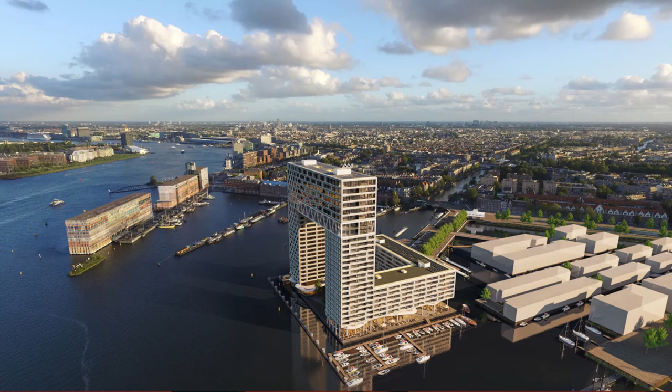Before Jeffrey and I start talking about how this building was engineered, let me give you a quick introduction to the building itself. In 2006, we won the competition for Pontsteiger, a building to mark the new old part of Amsterdam, Houthavens. These former timber docks are being transformed into a housing area.

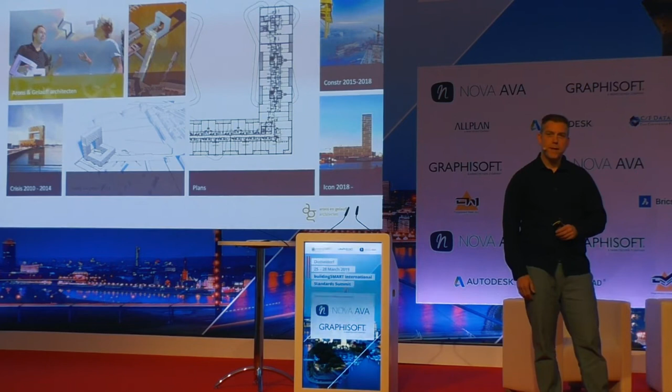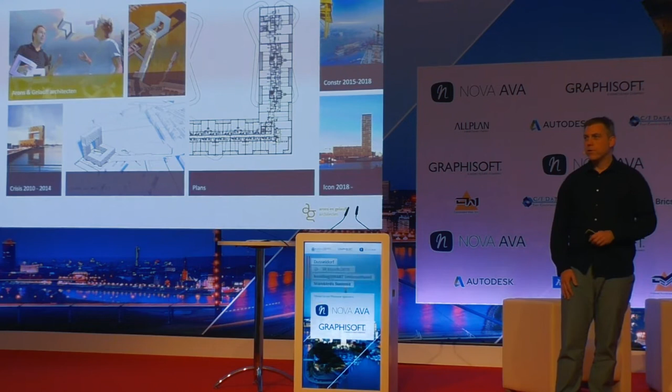Me and my colleagues worked very hard on filing the 2D building permit and finished just in time before the financial crisis hit. It got cancelled. In the years that followed, many attempts to revive the plan had failed, until 2014, where Dura Vermeer and Designclash bought the land, the water, the plan, and luckily they bought us as well. Construction started in 2015, and now we have a proud award-winning landmark, Pontsteiger.

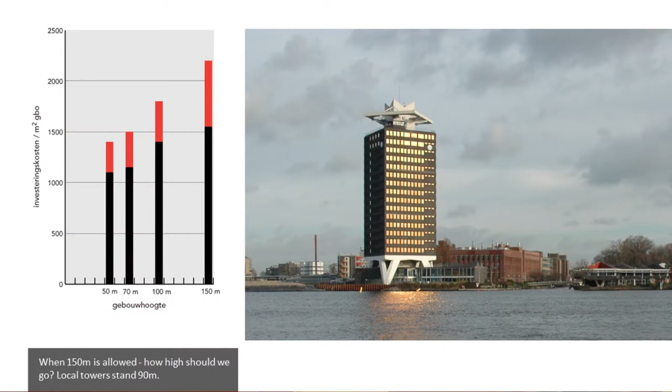But why does this building look like a chair? We were allowed to build a tower 150 meters high. But should we? Because all the local towers in Amsterdam are about 90 meters high. It's a housing project, so we need to take into account where people would like to live. It's no surprise to you that most people would like to live in a penthouse or at ground floor. So an hourglass shape is therefore the optimal solution.

Of course, we tried many other shapes. Now let me recap months of hard design work in a few simple steps. A tower. A high tower would be a landmark, definitely. You would have a great view over Amsterdam, and you can even see the sea. But what about the public space? Tower entrances are always windy, the view is for the happy few, and the surrounding area, Houthavens, will be low-rise.

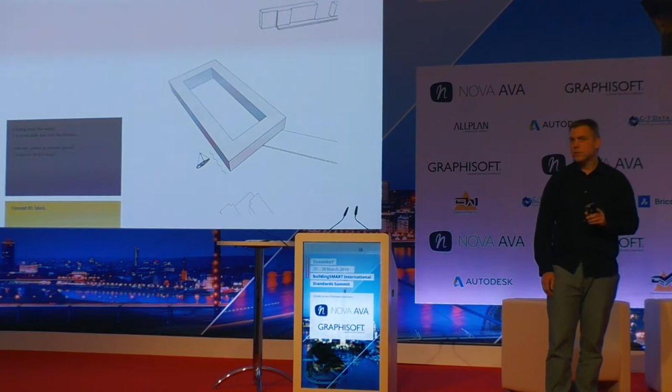A block then. Everybody would be living at the ground floor, near the water. The building would be in scale with the surrounding Houthavens, but there's an interior space. We would say, make it public, but the residents would like to keep it private. Oh yeah, we also got a footprint in the design brief, and a building like this would never fit.

A block tower then. Lots of people would be living with a great view. It's a high-rise, so it can become a landmark, and lots of people would be living on the ground floor near the water. And if we lift the building 2 stories, we also solve the public space.

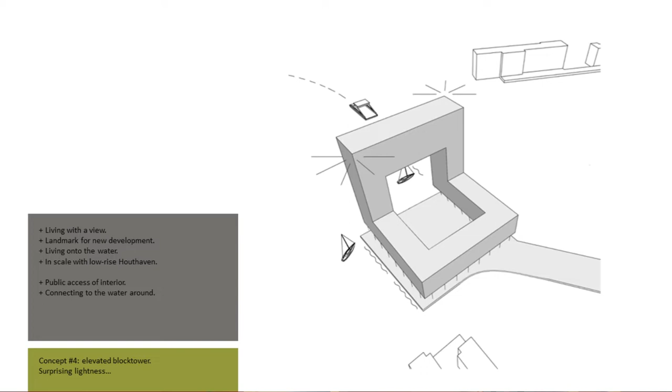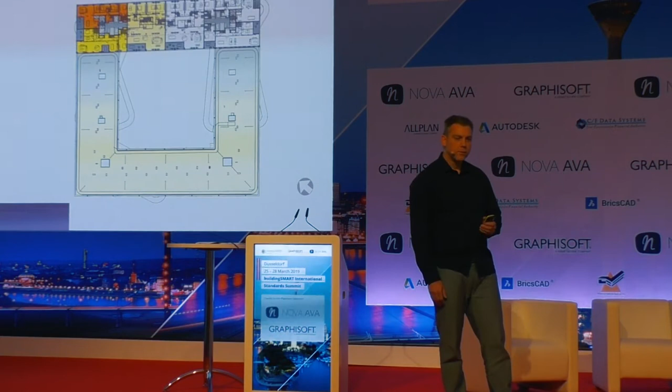Now, Pontsteiger means ferry dock. The old ferry dock was demolished to make room for 2 layers of parking, public spaces, entrances, and the new ferry dock. On top of that, the block tower. Low-rise and towers contain 300 rental apartments. On top of that, the part that we call the bridge, which contains 66 market apartments, expensive apartments with a beautiful view.

Okay, Jeffrey, let's build this landmark. Thank you, Menno. Very nice to see that an architect with such a vision can realize such a beautiful project. But how do you organize such a project?

For us, it all started with agreements, because with agreements you can come to a good collaboration, and with a good collaboration you can make such a landmark. So, how do we start? Get a room. If you get in a room with people, you can discuss the different ambitions that all the parties have, and also stretch each other to do a little bit more than they're used to. So that's what we did.

We defined our ambition, and then we started, not by reinventing everything ourselves. Lex van Zijn, also here with us, together we sat down and said, okay, how are we going to organize it. So we had a simple statement: use and combine available knowledge and standards rather than reinvent it yourself. And that was our motto during the whole project, and even now.

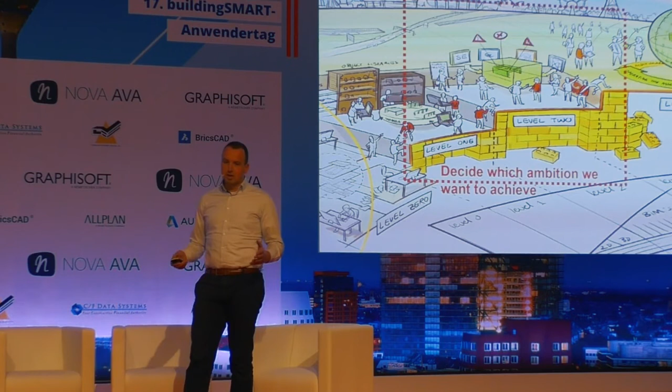In the Netherlands, we have the BIR, with also the BIM loket, and they described a vision about different stages of BIM. You could start by sharing documents, but that's not BIM. You can start at your own company using BIM models, but that's not BIM either. No, we said our ambition is level 2, so we want to share and organize BIM models throughout the whole supply chain. And we decided with the whole team that this would be the ambition.

What is our way of work? We didn't reinvent it ourselves, but borrowed it from Gieling on this point. We used a Hamburger model. I don't know if you know it, but it's a way to look at a project and to organize your project concerning information management.

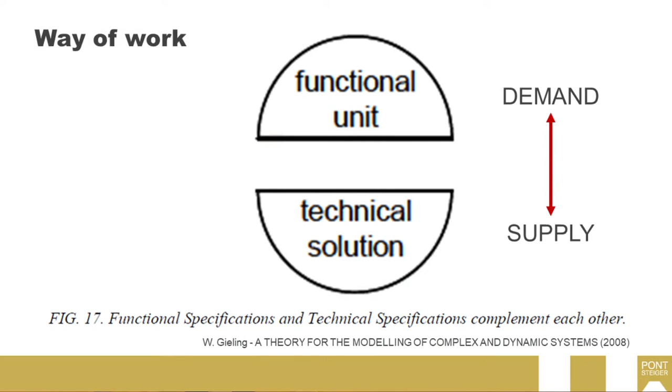It really has a demand and supply side, and it's key to have focus on the project itself, so everybody doesn't just look at their own part, but looks at the total.

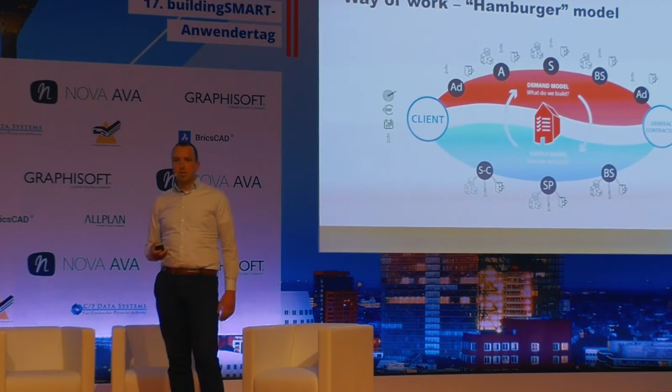You have a demand side with designers, the architect, the structural engineer, the MEP engineer, and afterwards you get together with the suppliers, with the people who install the MEP. You get all the knowledge on the table and get the best product for the client. So, two parties who not only build this project but also develop the project.

The most beautiful thing that happened here is that we got one vision on how to BIM. No company started with standards, but just from scratch and with all open standards in mind, naming the why, the how and the what. So we could convince everybody who wants to join this project, knowing what is expected of them. So a simple plan.

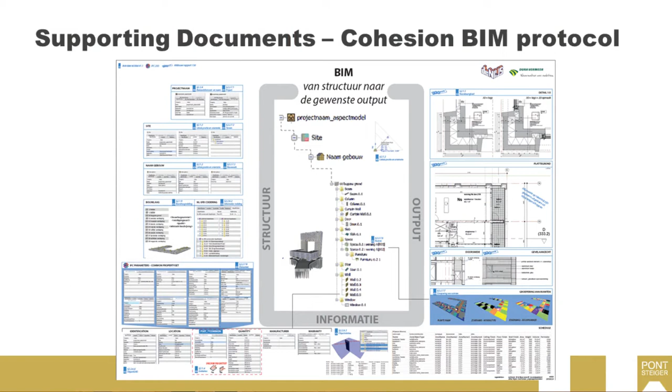But a plan is not only a plan if you don't explain it. So we all made supporting documents to explain to people how to use open standards, because in 2014, 2015 in the Netherlands it was not common to use open standards and to agree on this kind of things.

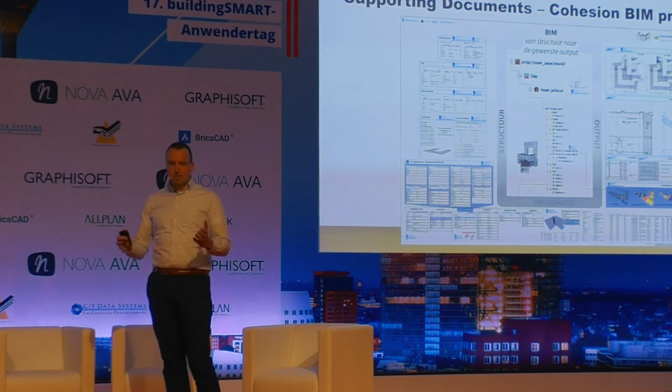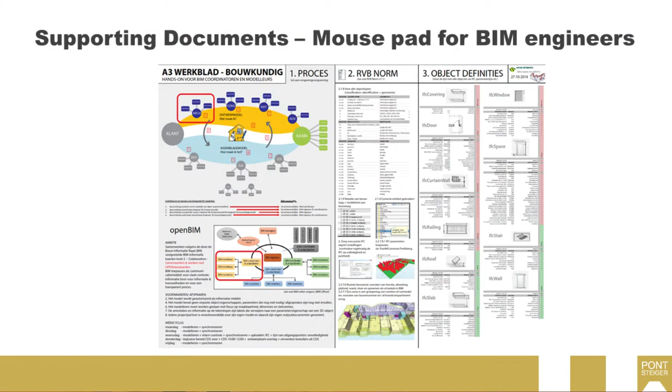We made mousepads for the BIM modelers and BIM engineers to make it easy for them to follow our agreements. Because you can say, here's your contract, do like the contract asks you to do, but you can also motivate them, help them to really accomplish that.

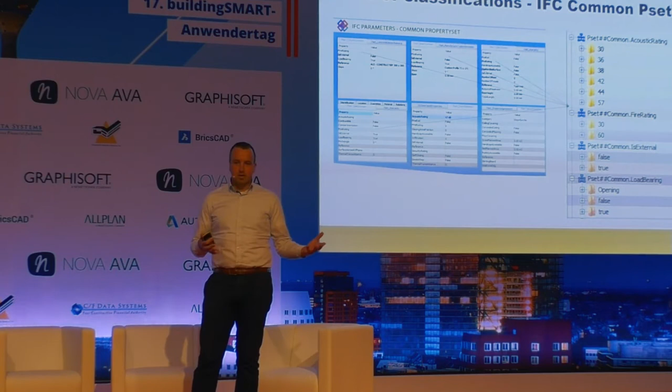So that was really the story about agreements, and then you have to go into the project and help each other. Help each other to export the right IFCs, help them put in the right information and find information by use of classifications, and make sure that if someone doesn't get it, you explain what's handy about it. So we do all kinds of stuff to show other people how this works.

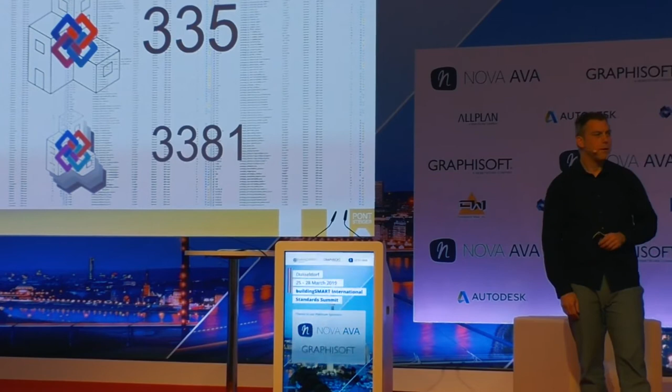So in order to clash, we first need to build our models according to all the agreements that Jeffrey just explained. Clashing two perfect models will still result in too many issues if there is no communication. We need to get together.

This was already a challenge in the design phase, where there were only three companies working together. We all used the same software, Revit, so we could link each other's models into our own to create a fast workflow.

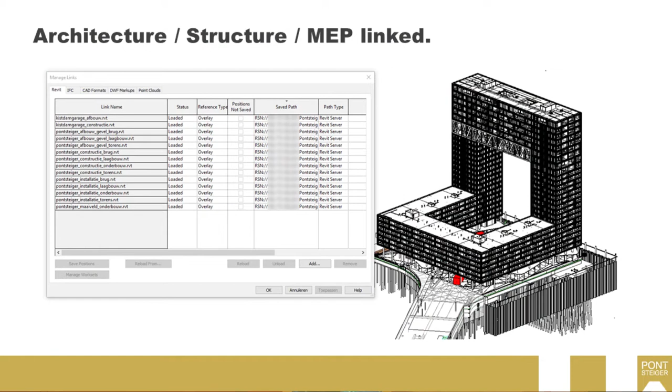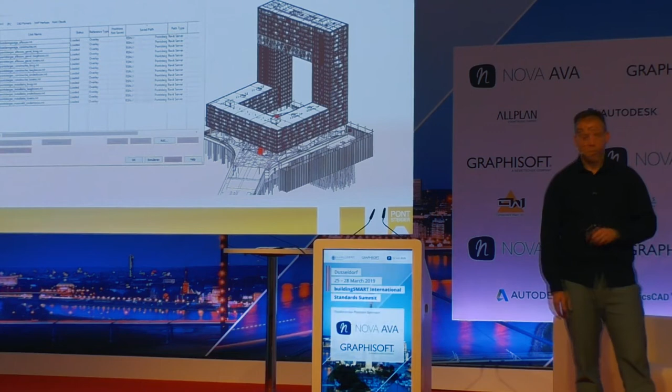Five years ago, we were still getting used to the Revit server and all the demands regarding openBIM. So every two weeks, we would export our models to IFC, which was then checked by the contractor and discussed in meetings. Now, we not only need to get together, we need to start working together.

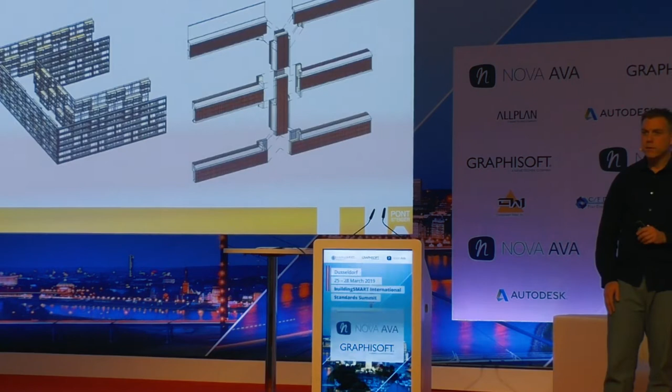And now we need to get even more technical with more people. That's why we decided to dedicate every Thursday to the project. I would start in the morning modeling. At 9, there would be a BIM meeting where we would discuss all the issues and clashes. And yes, there's a big difference between an issue and a clash.

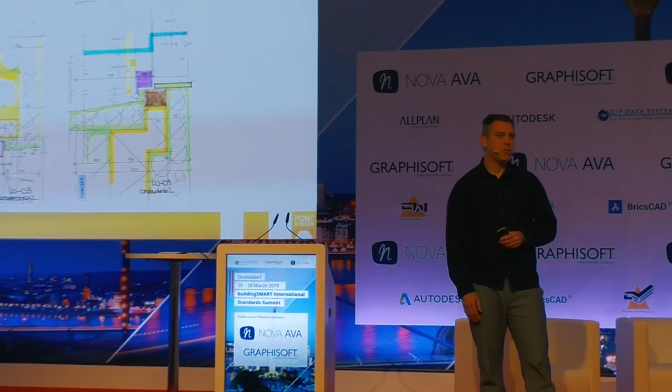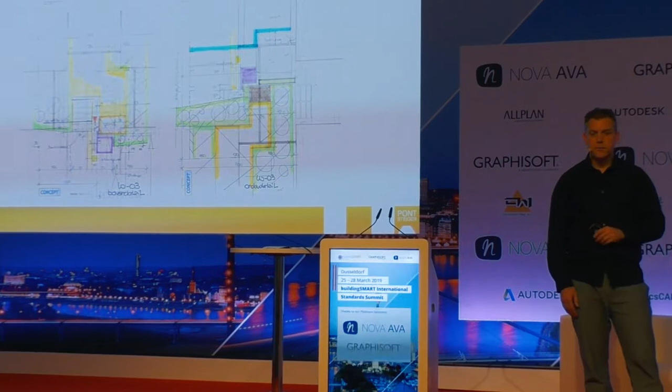For me, as a modeler, it was very convenient to stay all day. Usually after a BIM meeting, lots of people would go back to the office, but I would stay, work on the issues at hand. All day I would attend all the technical meetings, so details were drawn on flipovers and smart boards, generating direct input for the model.

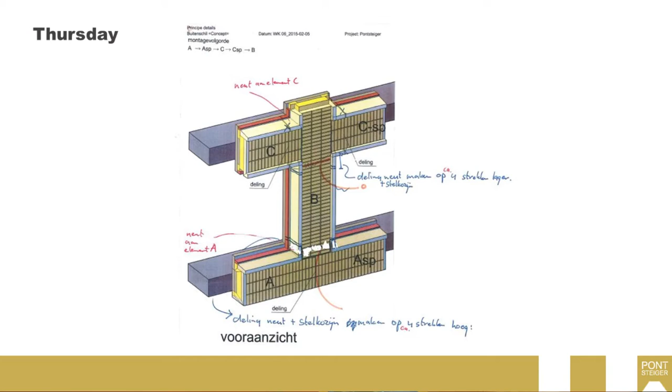We work with people from all over the country, so elements and their engineers had to come from all corners, so spending time efficiently was key. By the time they went home, they would check up on me and could already see some of the elements in 3D we had already designed that morning.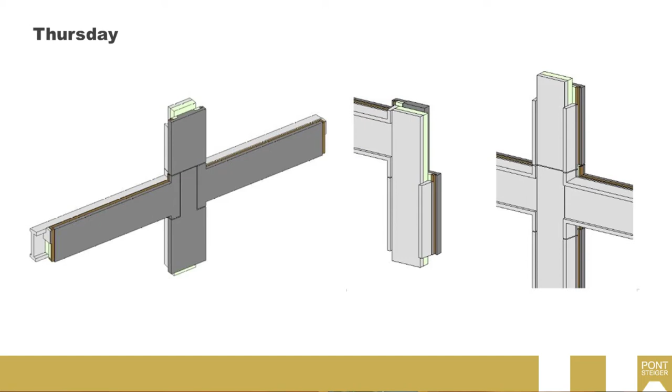And now let's build together. The openBIM approach is applicable to anything. No islands, no secrets, no worries. We share everything we do and make.

And yes, that can be very scary, especially for smaller companies who are afraid of being taken advantage of. Concurrent engineering is a place outside most people's comfort zone. But it makes building a lot more fun.

So, when you get together, you make good models. Then the next step is to coordinate all that information in those models. So how did we do that?

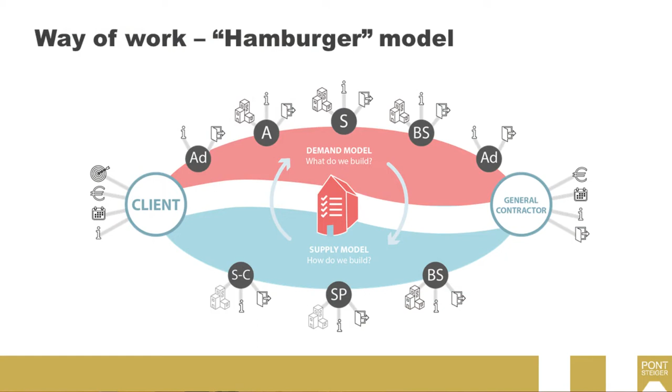Starting point, the Hamburger model. It allows us to focus on several points of model coordination, and I will take you through it briefly in 4 steps.

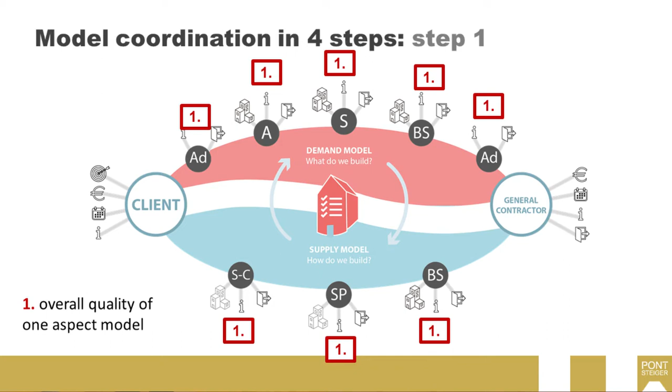So the first step, first of all, check if the model is okay in itself. Did it comply with all the agreements that we made? Check the different parts of the agreements, and if it's not okay, fix that first, because if you want to coordinate, this is the basic requirement.

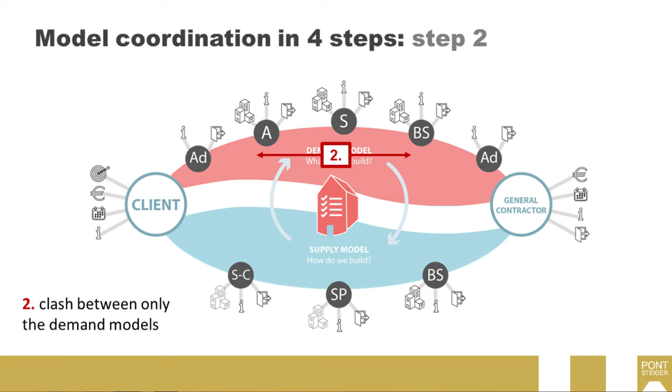Then step 2, you want to get your demand models all aligned, because it's the communication towards the suppliers that gets them working. So we did two things: visual control, looking at the models and detecting any errors, and clash control, setting rule sets between the different disciplines to make a control about it.

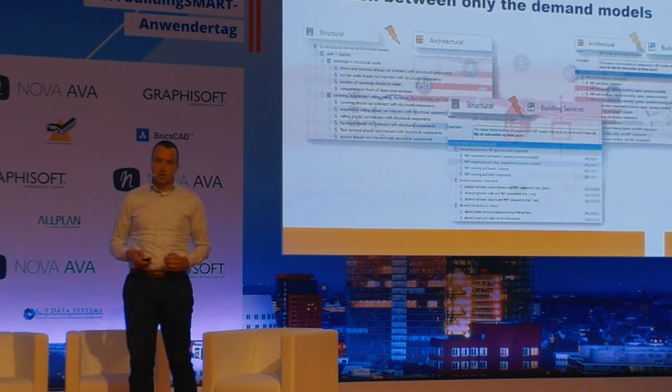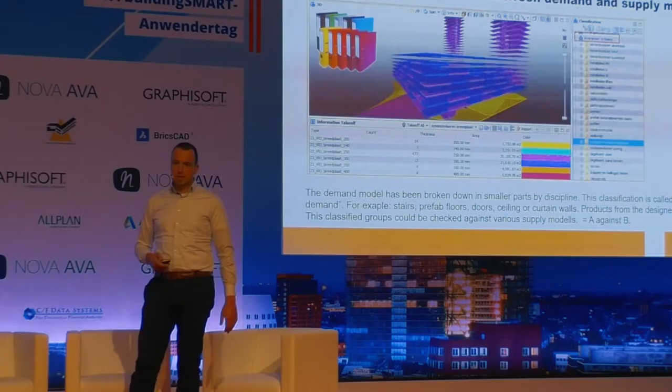Then step 3, look if the supplier delivered what is modeled in the demand model. So you can check if it's between the agreements, and then you can filter the model and check if it's okay. You can make a demand model and overlay it with the supply model, look at the different parts of it, and by clash control you can automatically detect if it's okay.

So this is a supply model and it detects any deviations. Here you see all the things you maybe have to check.

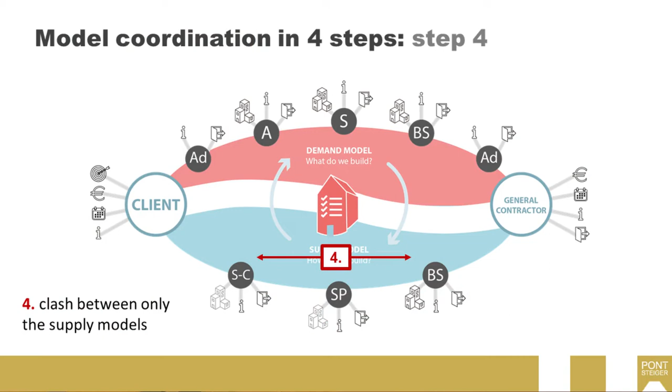Then step 4, check the supply models with each other, because this is a crucial step towards assembling the building at its place. So the detail level really gets up, and the importance of checking this throughout the whole project is really important to have no problems assembling the building. So here you see a beautiful example of that.

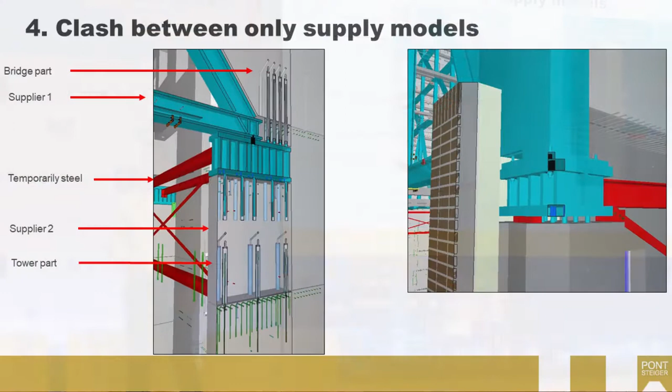Then, how do you organize all these model coordinations? You have different roles. Every team got its own BIM coordinator, and we had, because of the scale, also 2 BIM directors, Mark and Maaik, who were really great. Lex and I were thinking a lot about which agreements you have to make, and these were the pit bulls who really made it happen and got all the parties aligned. Really great job what they did.

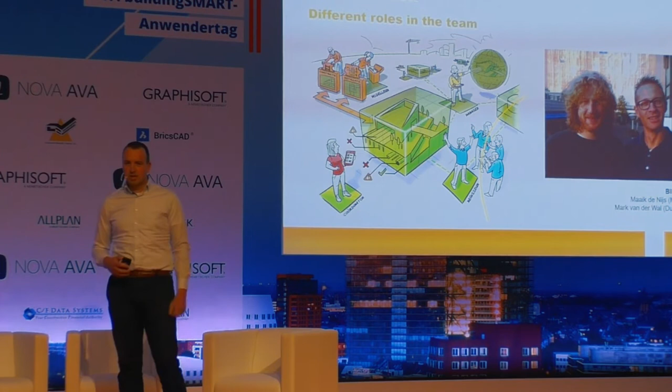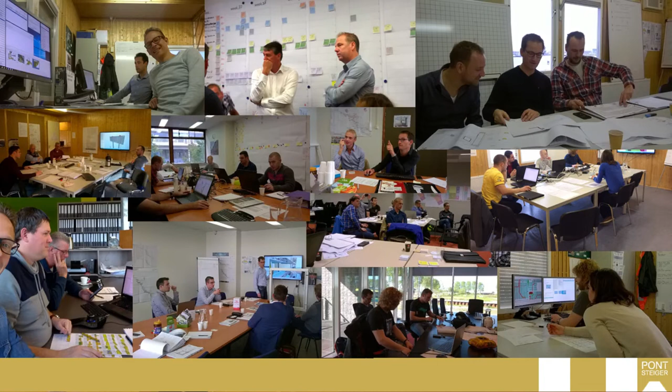And what they really did is activate the whole team using trusting models. That's really an achievement, because at that time, not all the companies were used to working like this. So you see all kinds of pictures about working together with the models in mind, helping each other, and I think it's a really beautiful example.

BIM director, a new profession in the building industry.

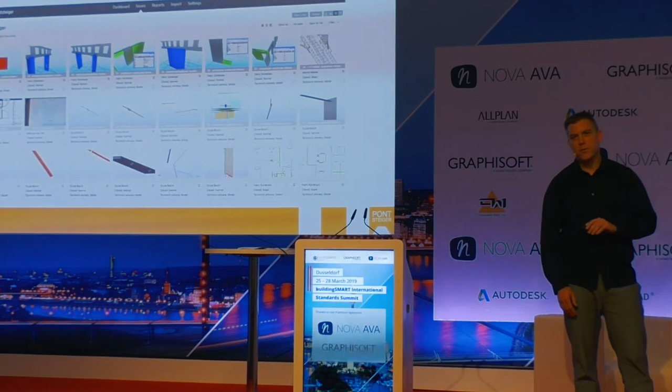With BIM, remarks should not be made on 2D drawings. This is a thing of the past, since annotating a 3D model into old-fashioned 2D drawings takes forever. Now, the best thing about openBIM is the export to IFC. And because every building phase was a couple of months too short, we may have created a few issues we couldn't resolve before creating new ones. About 6,000 of them, of which 800 are mine.

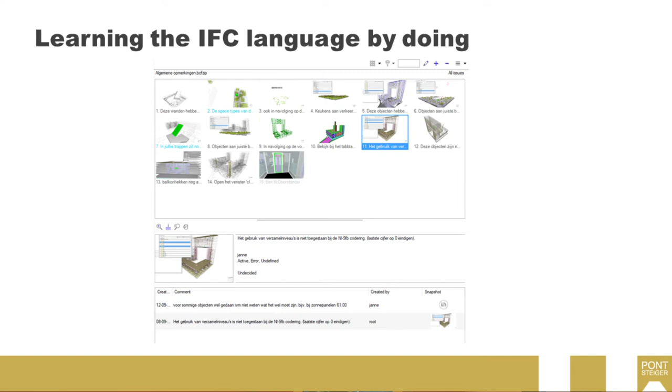5 years ago, we were still getting used to openBIM, didn't know all the IFC parameters just yet. For example, the Dutch NL-SfB classification code has been around forever, but as architects we don't really use it that much. Contractors especially use it for filtering and sorting.

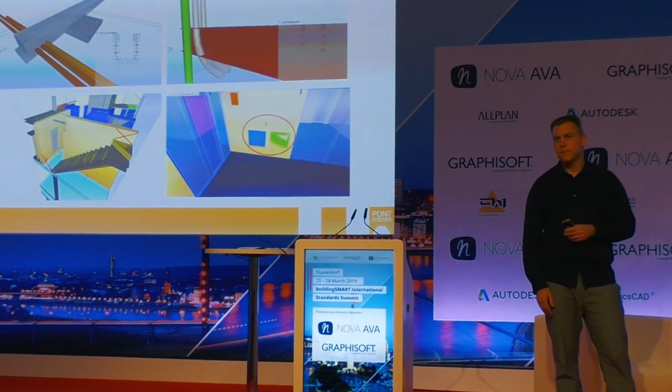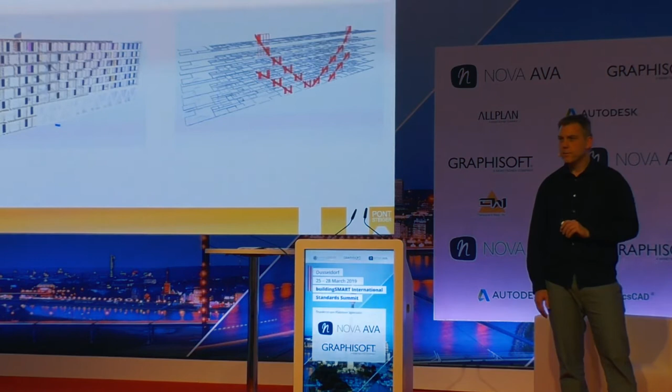So all these issues were then stored in reports that we would discuss every other week. Now, clashes, I really don't have to tell you this because everybody knows what a clash is, obviously. Clashes are, the contractor did this in Solibri, checking if geometry intersects with other geometry, or maybe checking if a window can still be opened and doesn't hit a column.

Now, as a team, we got to test the issue management platform BIMCollab. This is a website, a portal where all issues are stored and accessible for all the team members. Issues and BCF files can be uploaded directly from the Communication tab in Solibri.

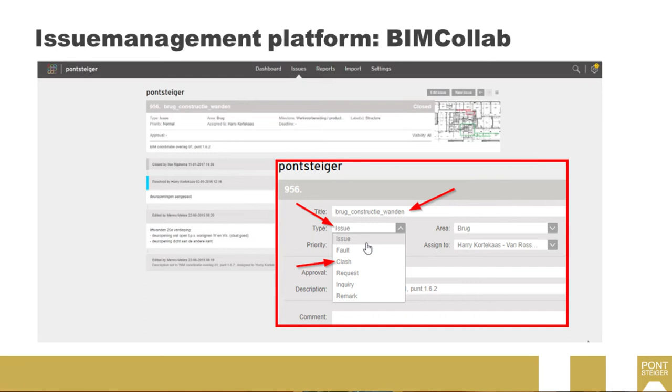Now, when creating an issue, you can decide what kind of message you want to relay. Is it an issue, a fault, a clash, request, inquiry, remark? We just stuck with issues and clashes. Keep it simple.

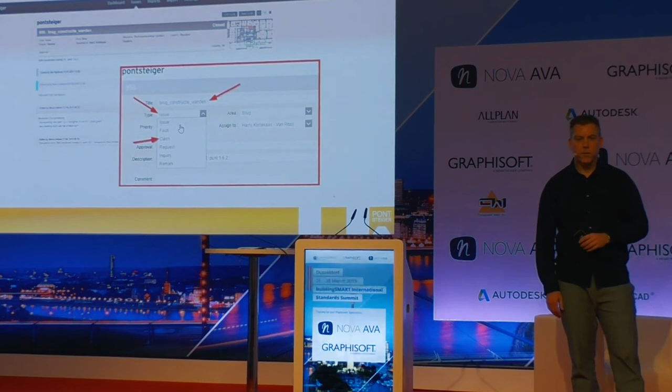Now, I would sometimes create an issue if I would like someone else to change something in the model. Usually this is already discussed over the phone or in a meeting, but by creating an issue, the whole team knows that we discussed this.

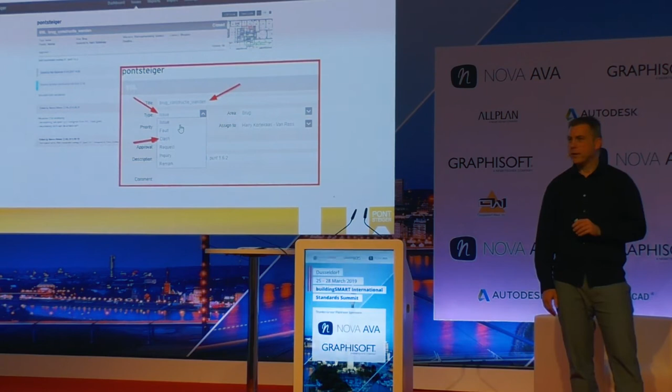So in this example, I show Harry, the structural engineer, what wall opening he should remove and which one he can leave in. So I create the issue, Harry then changes his model and resolves the issue.

Now this is very important, that the resolved issues are still open. They are then checked by the contractor, and if agreed upon, the issues can be closed. If not, the issue can be reopened.

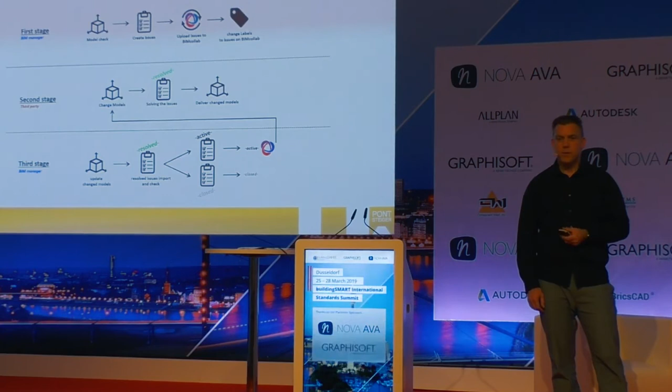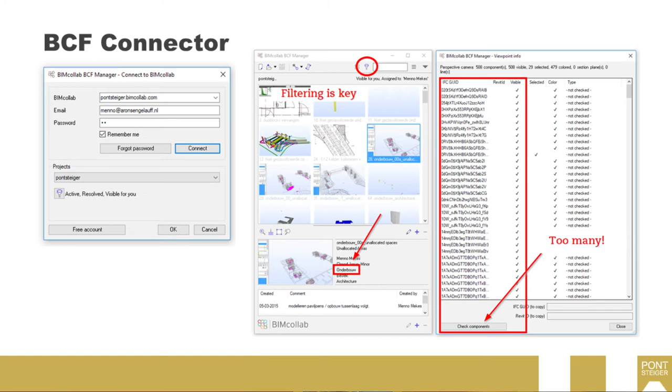Now, looking at slides in a meeting is nice, but I'm a modeler, so I have to fix these issues and clashes. So with BIMCollab came the Revit BCF Connector. Now, there are other connectors around, but this one has the advantage of a direct link to BIMCollab.

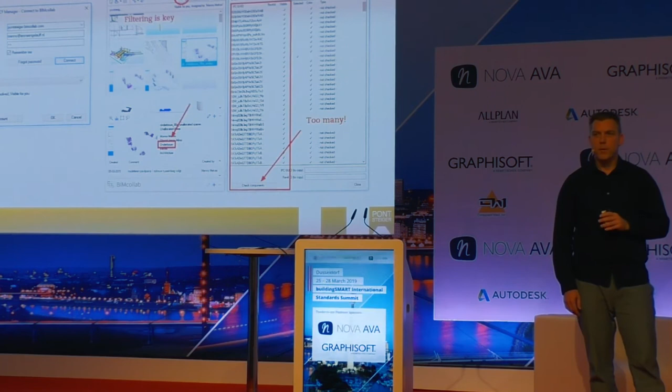In Pontsteiger, we've learned two important issue management lessons. First, always be very careful when creating issues. Use only one or two elements that are related to the issue, not all elements visible in view like you see here. Use the area correctly, so the modeler can filter by model. If I work in a facade model, and there are already three facade models in Pontsteiger, I don't want to accidentally double-click an issue related to something in the basement.

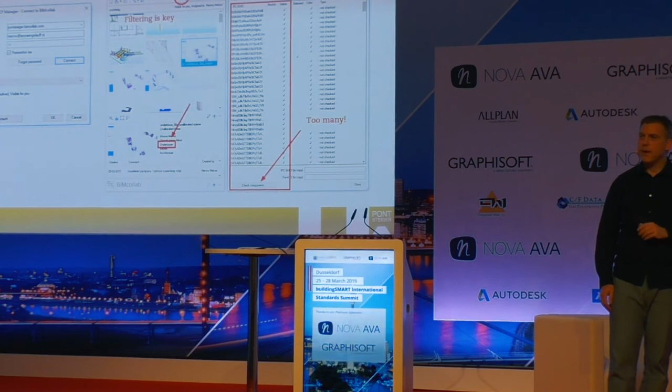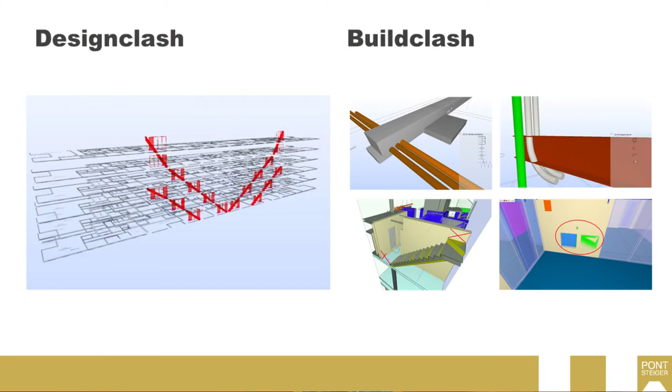You can also use milestones to push issues forward in time to the next building phase, because most of the obvious clashes I showed you earlier are less important in the design phase. Of course, you need to keep them in mind, but work on the bigger picture first. Being able to open a window or change its glass panels is far more important when designing a building.

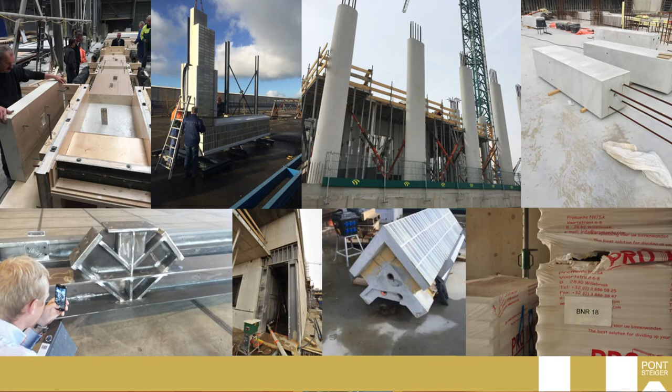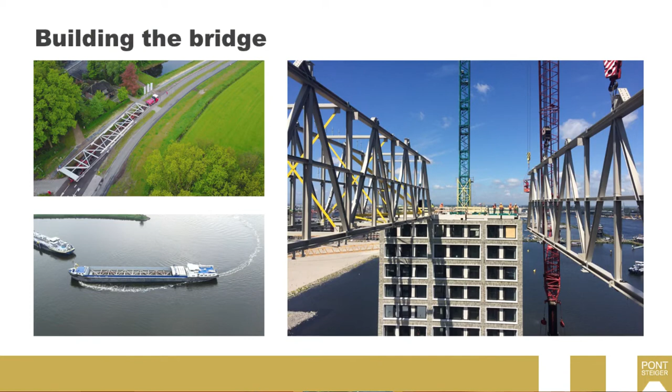Pontsteiger followed the 80-20 rule in everything. 80% of this building is being prefabricated. At 60 meters high, from a boat, four steel frames the size of a bridge were placed on top of prefabricated concrete walls, and they all fit. No cutting, no welding, no breaking, just hoisting and fixing.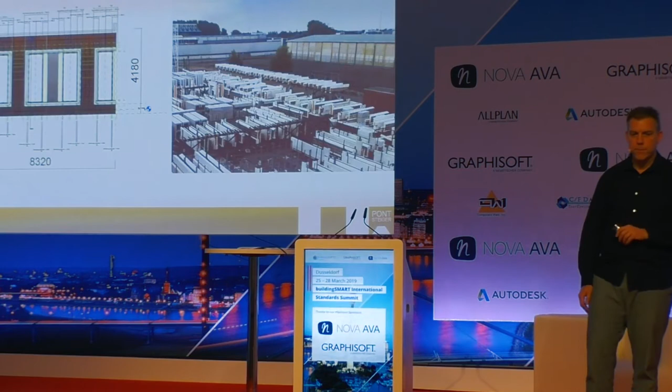If you think 6,000 issues is a lot, it's necessary. To build this precisely, we have to simulate everything in the BIM beforehand. Pontsteiger is really big. All the prefabricated elements are big, heavy, and numerous. I even had to cut a few of these in half because the crane couldn't lift them.

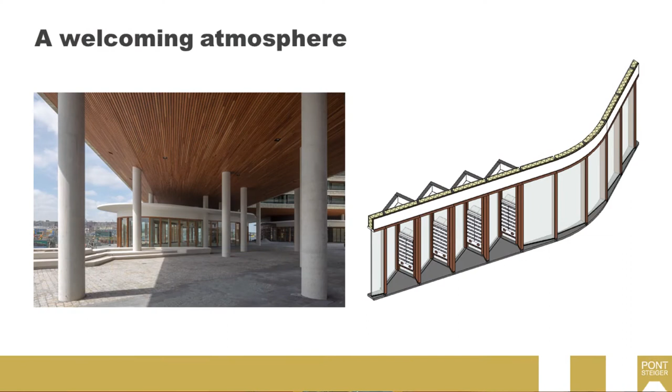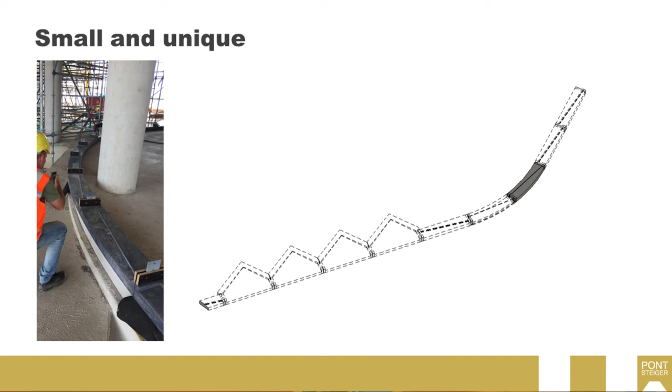But that is the mass of the building. At ground level, we've created four beautiful curved pavilions, wooden curtain walls with straight glass panels. And here we find a hidden treasure of prefabrication: concrete window sills, 400 of them, 280 unique ones. So you see that prefabrication is not just about the sheer number of repetitions.

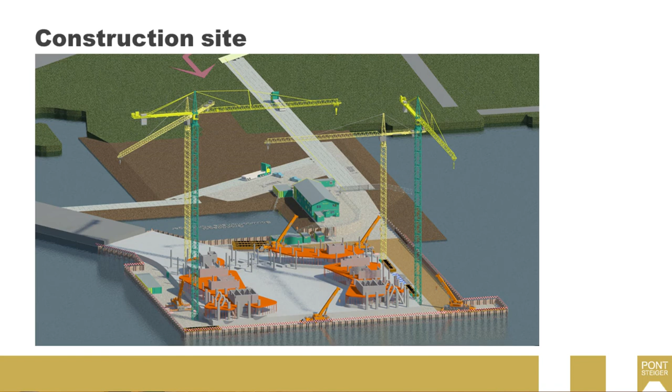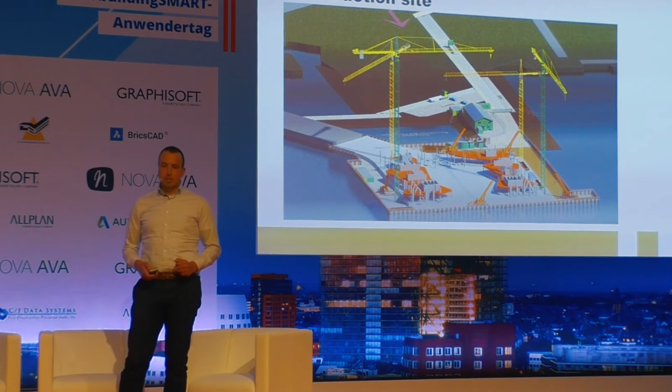So what did we do at the start of the project? We certainly made sure that the construction site is totally in BIM. Not only to make it visual about what's coming where, but also to think about logistics, communication with the municipality, and the certain things you have to encounter.

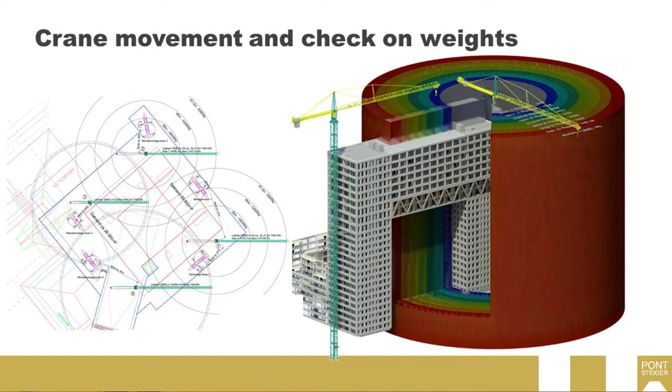So what we did is think about the crane movements and the crane weights, what's possible. But also we think about how it will get there, how the crane will stand on its own, and maybe it had consequences for the things we have to build. So temporary facilities are also important to take into account when you think of BIM. It's not only about the end situation.

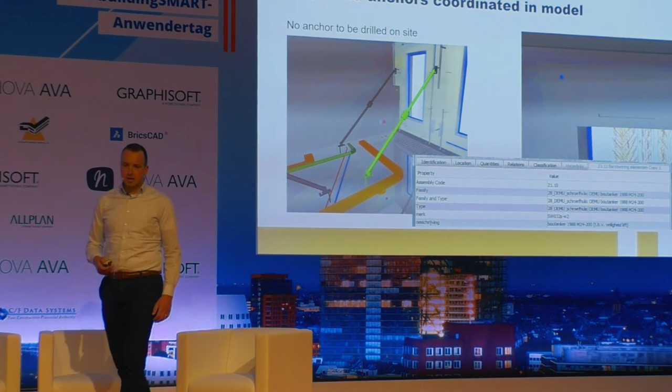So what did we do more? Because with all of the prefabrication, we have elements, but those elements had to stay in the right position. So all the props and anchors that were needed were also taken into a BIM model, so we made sure that there was no drilling necessary on the site. We had a lot of anchors and props, but they were all coordinated and nothing had to be drilled on site. That's really a time effort, but it has a beautiful result.

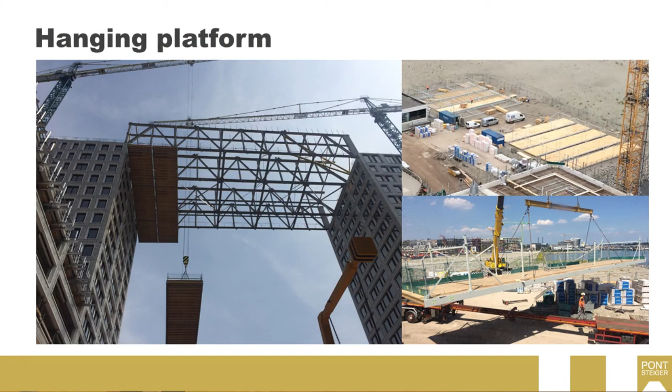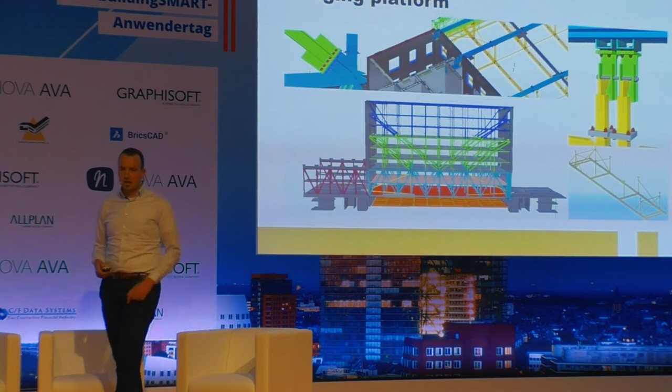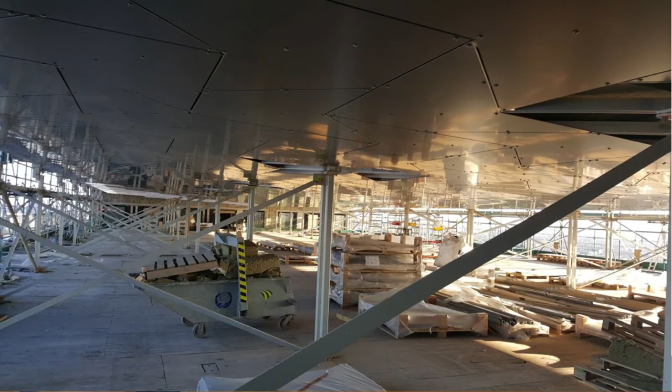Then we had another thing, because we had such a bridge construction, how do you do the ceiling from beneath? That's really a challenge for the whole construction team. So what they thought about was making a hanging platform. But how do you do that? Designing it first in BIM, so you can think about the consequences, make sure it's possible, and, really important for us as general contractors, you can work safe. Because if we can't work safe, we don't work at all. So this is how we get a beautiful result, but in a safe way.

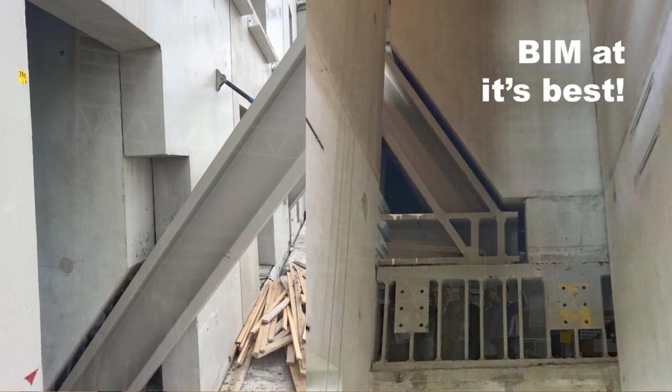I think we've shown in the last presentation and in the way we did BIM on this project, this is BIM at its best. Not only because we made a landmark with it, but also because we had beautiful details in the building—some you will see, some no one will see at all. But this is really beautiful, in my opinion. And we had a beautiful team. I believe I've made more friends on this project than any other project at all. The beautiful thing is that they're all proud of being part of this project, and we are even prouder that we won the award with this project.